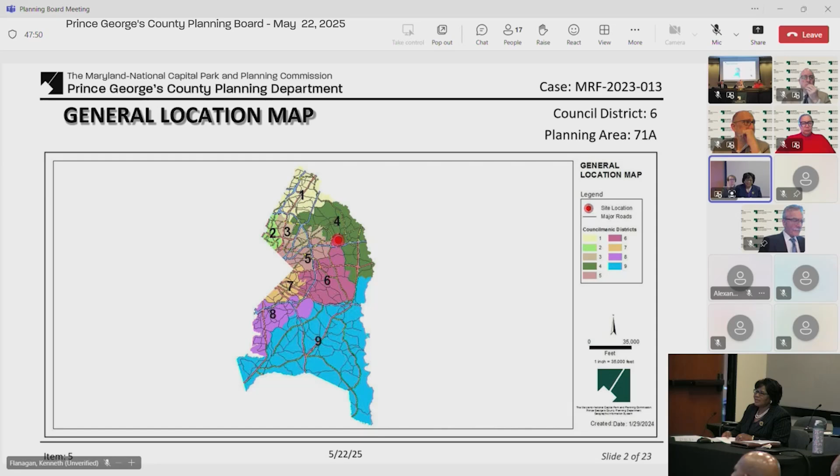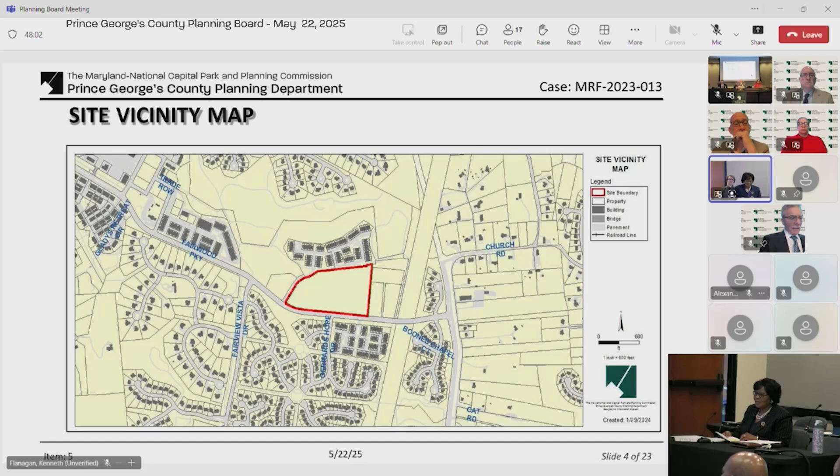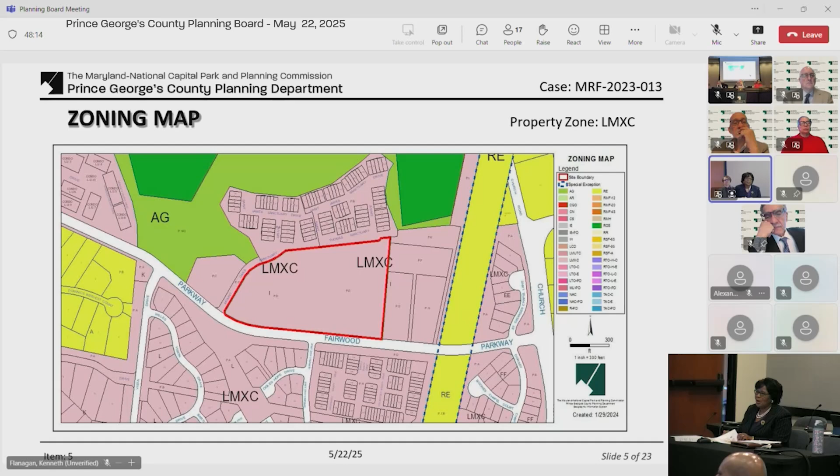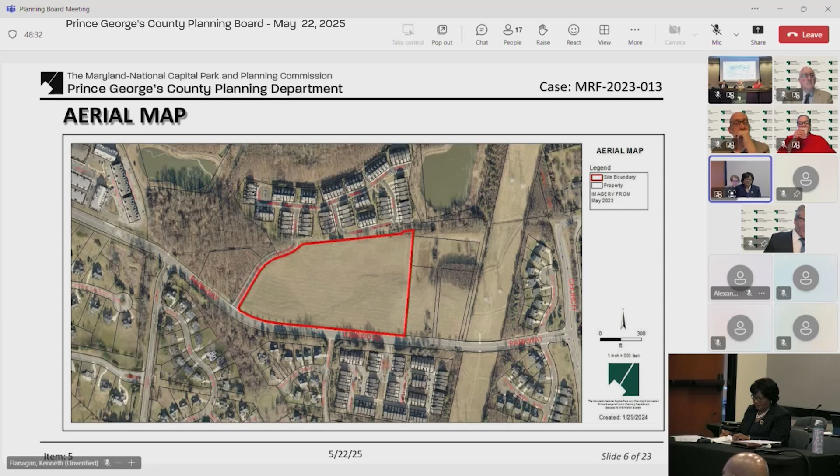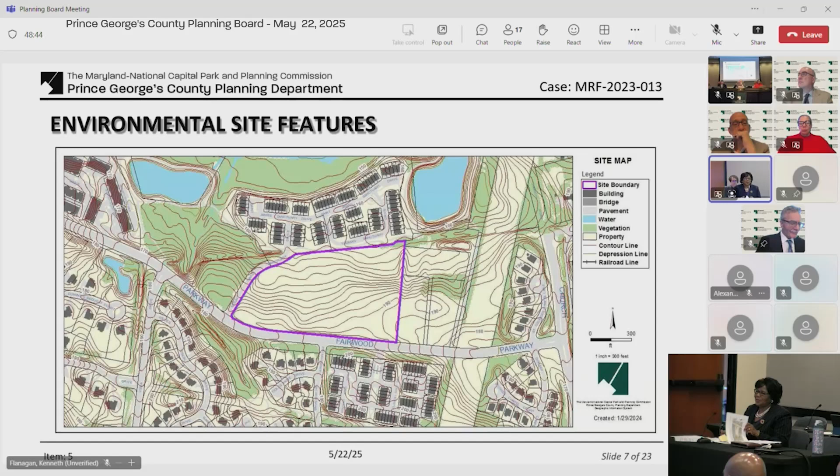This is an aerial view of the site. It shows residential area in the north. The project site is highlighted in red, and you see the townhouses in the north and south, with a vacant portion in the east, and the Pepco line on the east side of the site. Next slide, the environmental features show a relatively flat site with very few trees, and it's open field.

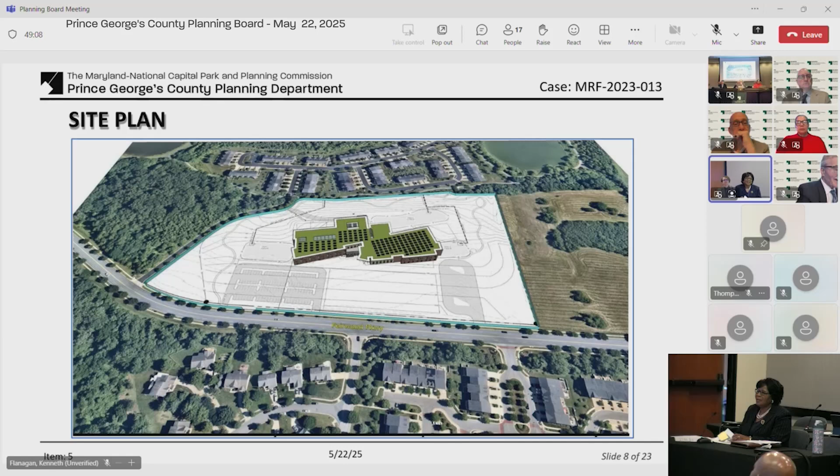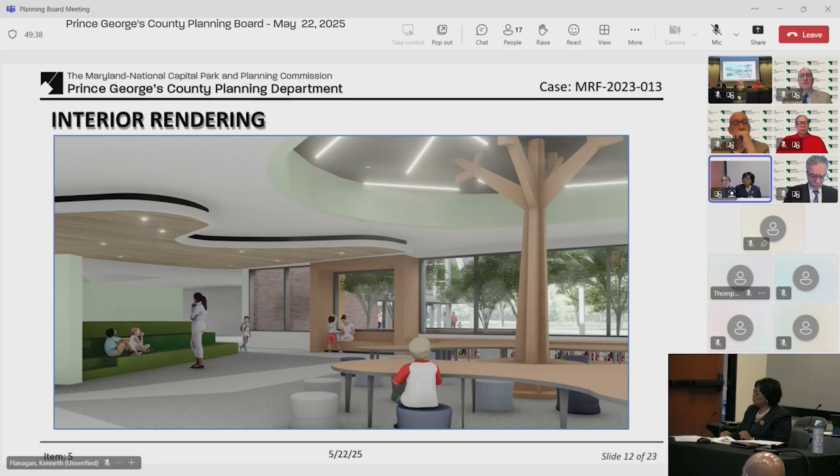South elevation. Next slide. This is a rendering of portions of the interior, showing how this high performance, energy performance building will look like when children walk into the building.

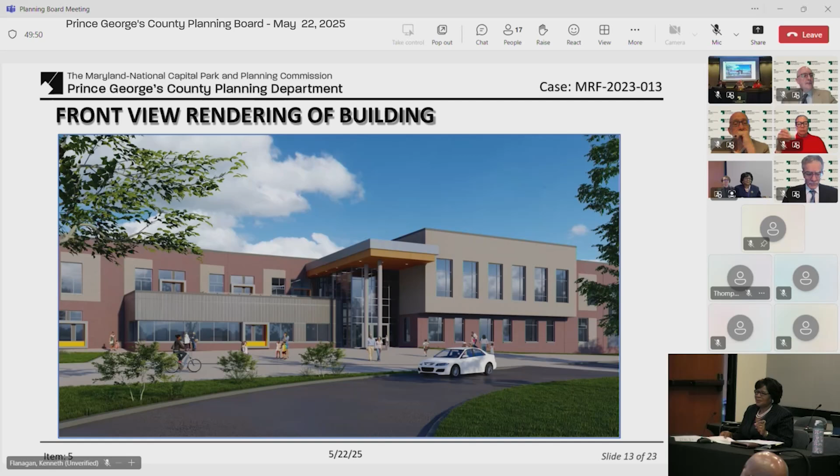Next slide, please. This is the circulation that shows the bus loop, which is at the front. Fairwood Parkway, south of the site, brings access to the side with the bus access shown in blue that makes the loop turn to bring students in the morning and take them out for queuing. The recommendations will include information on circulation and a lot of staff recommendations on how safety could be made efficient. So this is a new school bringing change in that section of the community.

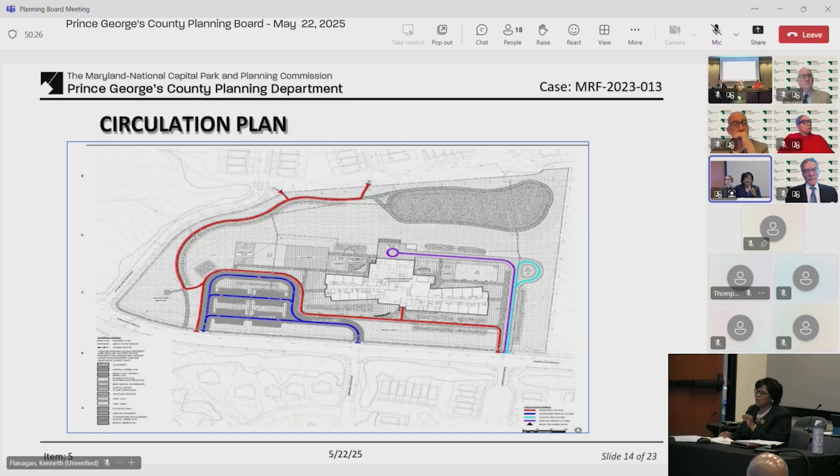How are people going to walk to this site? How will students walk there? How will the buses get in and out? And how will students be able to walk from the different neighborhoods to the site?

So the next slide is a landscape plan. Again, it shows white being the building, which is the 2-story building I mentioned earlier. It shows the bus loop. You can see south of Fairwood Parkway with the green in the middle. And this school, as many of the phase 2 schools, has outdoor classrooms, which is kind of a neat concept.

And then at the end of it, you can see the stormwater management pond, and the road, traffic, and pedestrian network wrapped into the site with the greenery, allowing the elementary school students to be able to be outside, with connections from both the southern part of the community, which is townhouses, and the northern part. This school is in the Fairwood community, which has about 2,000 residents, so there will be a lot of walking into this school as well as driving.

Next one, please. Next slide. This shows a little bit of plantings, what the landscape will look like from the previous slide I just showed about the landscape plan. This is just a specimen of what the native planting will look like.

Next slide. This slide highlights what the P3 school is going to be doing in most of the sites where they're building, what the outdoor classrooms will look like for students to be out, to be able to learn openly.

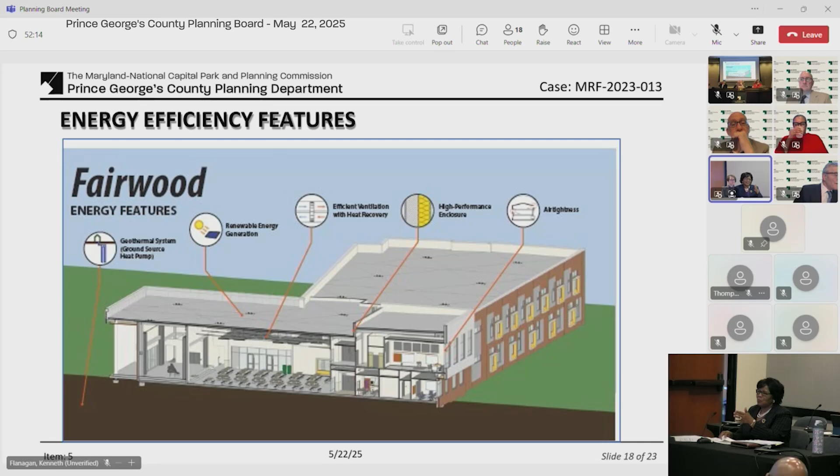Next slide. It's a high performance building, so it shows exactly the different elements of the environmental design for this site, how it will look like, and bring in open light, natural light into the area, and geothermal development. The next slide will show the features I highlight and explain more about the energy efficient features. Next slide.

So the feature I propose here is a 2-story building, 83,195 square foot, located at address 113250 Fairwood Parkway. It has 70 parking spaces, 4 ADA parking spaces (2 standard and 2 van spaces), 2 EV charging stations, 3 standard EV parking spots, 1 AV and 1 ADA van parking spot, and 15 bike racks with 30 parking spots.

There are outdoor classrooms, which I mentioned earlier. And as I said at the beginning, this new school will help shift the population of existing schools, which are Woodmore Elementary School, Glendale Elementary School, and Kingsford Elementary School.

The project schedule, the next slide, please. It brings us to project readiness, as you can see on the slide, to be 2027. And if there are any questions, I'm sure the school staff is here, they'll be able to respond to the schedule and how they will be able to address some of the concerns I raised with recommendations in the staff report on connectivity and traffic within the site.

The next slide gets us into recommendations. The first 3 slides really bring in some requests from staff for some things we did not get. We're asking the applicant to be able to provide them, and that's what the first 3 slides deal with.

Oh, okay. No, it is numbered. It's a little distorted, but it's just to the left of the curb cut of the entrance. Oh, number 11. Okay. Did you touch it? There you go, the cursor is on it. Right here, okay.

Is the monument sign a backlit sign? I'm just thinking of light pollution and intrusion on the neighbors and things like that. It's not, it's an LED sign. So we don't need to be worrying about the visual impact of the lighting? We have to put specs on it, so we're happy to provide that. It's very clear what it is, and you shouldn't have any pollution from that. Okay, great.

Signage questions? My concern isn't the monument sign. What I'm thinking about is signage for safety, so that if there are intersections - I know we have them in some of our parks - they light up. The US government has them too, across the river, they light up. I think they're probably solar, I'm not sure, but they light up and warn people that there are students and children present.

Carl Wilson, our traffic engineer. Carl Wilson with the traffic group. This is not signed as a school zone just yet, but it will be. The manual on uniform traffic control devices has a standard package of signs that would sign this as a school zone. Then there are additional signs you're referring to that could go near the crosswalks - beacons, essentially, where buttons could be pushed. They could be either solar or powered. We can work with DPIE and DPW&T to figure out the best way to install those.

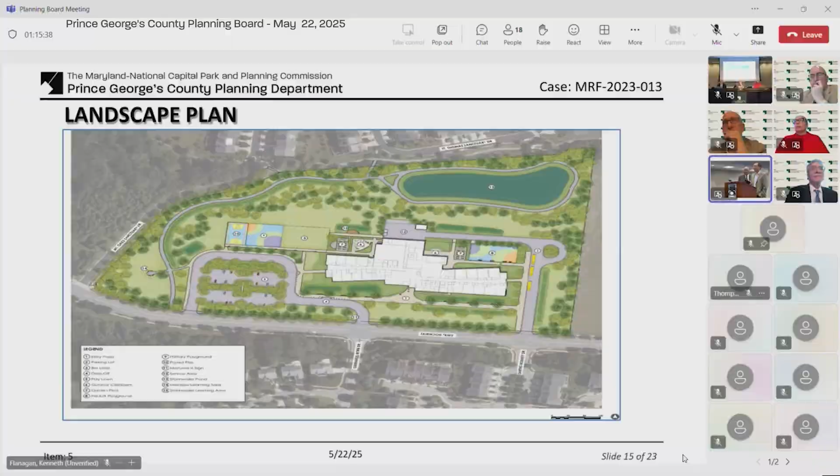Are there any conversations, maybe this is for you Sean Moore, with our Department of Parks and Recreation that would be helpful for you? And if not, it's okay, I'm just wondering if there's some value in that.

As you know, we're trying as a school system to work with the M-NCPPC to make sure we have a shared use of our recreational spaces, like the gyms and that sort of thing. There's no competition style field there, so it's not a major issue for them. One of the things the community's asked us to do is not turn this into an attractive nuisance, so we may end up fencing off the basketball court so we don't have unauthorized use during the evening time. Other than that, the spaces will be open and people will be able to walk across the campus or through it from a recreational standpoint.

Okay, thank you for that. What about security during the day for the kids? Because the flip side of open, accessible and walkable is we've got kids there and anybody's got access. So will there be security guards or?

There most likely will not be a security guard, but the building is designed using CPTED methods, so there are visual deterrents that will keep people from wanting to enter the way the administration sited. There's also going to be a controlled vestibule, so people won't be able to access the building itself without going through the appropriate locations, and the doors will be locked. There will be access to the outside for kids to play, but again, this will be an open visual area. As far as elementary schools go, this should be fairly safe. Of course you can't prevent everything, but for the most part, the site will be very secure.

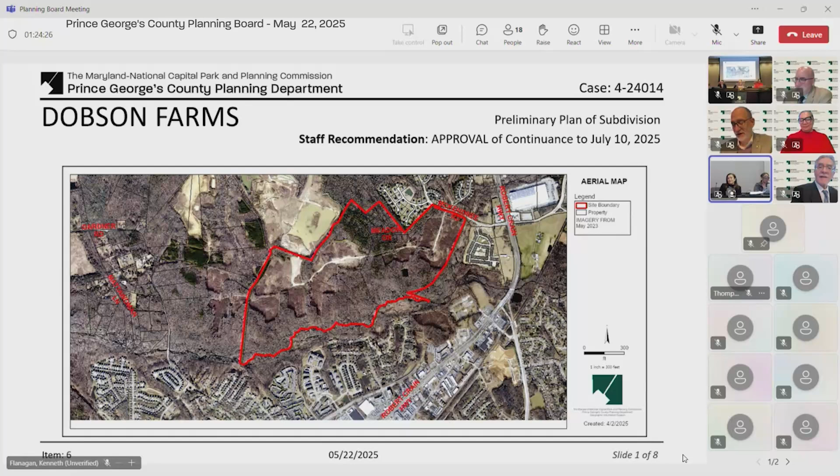I'll call the roll. Commissioner Washington, I vote aye. Commissioner Giraldo, I vote aye as well. I vote aye. The ayes have it, 3-0. Thank you, Mr. Tedesco. Thank you, Ms. Vatandus.

Item 7 on our agenda, Countywide Planning Division, March 2025 Cycle of Amendments, 2018 Water and Sewer Service Area Changes. Mr. Ray, this is yours, take it away. Thank you very much. For the record, my name is Bobby Ray with the Countywide Planning Division, and agenda item number 7 is a review and recommendation for the March 2025 application to amend the 2018 Water and Sewer Plan. Next slide, please.

The role of the planning board in this review is a determination of consistency with the general plan, to provide any information and/or assistance needed by the county executive and county council. The memorandum included in the packet provides planning staff's recommendation as well as the county executive's recommendation for the application received. The larger report provides all the comments from the planning department as well as comments from WSSC, DPIE, and the county health department. Next slide, please.

One application is being reviewed for the March 2025 cycle. At the regular meeting of May 6, 2025, the county council introduced resolution CR 053-2025 for the March 2025 cycle of amendments. Next slide, please. This is our sole application for the March 2025 cycle.

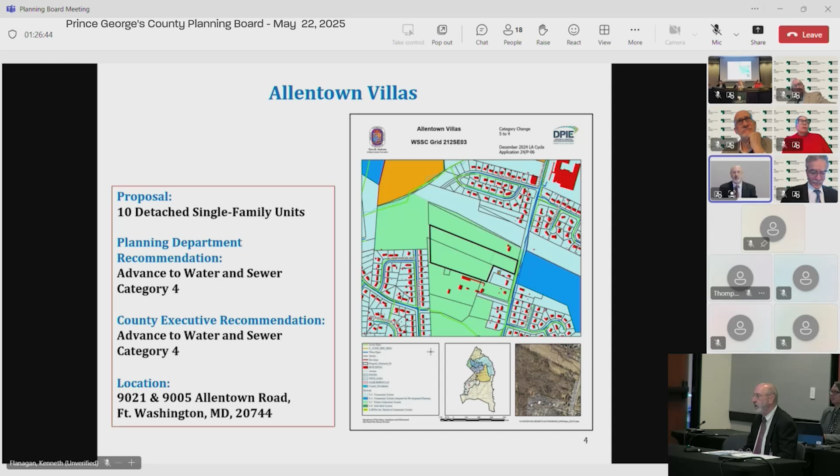Allentown Villas is a proposed development with 10 single-family detached units at 9021 and 9005 Allentown Road in Fort Washington. The request is from Water and Sewer Category 5 to Water and Sewer Category 4 and is supported by the County Executive's Office. So staff requests that the Planning Board direct staff to submit the planning comments to the County Council for their consideration as this moves through the process of committee and then back to the County Council for hearing and action. That concludes staff's presentation.

Thank you, Mr. Ray. I see Mr. Rivera is signed up, but I don't think he's here. I don't see him online either, do I? I'm here. Oh, you are? Okay, great. If there's no questions for Mr. Ray, we'll turn to our sign-up sheet. Mr. Rivera, anything you want to join in on with this? And of course, if you could introduce yourself for the record.

Thank you, Mr. Chairman, members of the board. For the record, Norman Rivera, representing the applicant in this sole category change application. As Mr. Ray has stated, the staff is recommending approval. The county exec recommended approval. DPIE and the other agencies have also recommended approval. The land use is in accord with the established communities, part of the general plan, the master plan, et cetera. So we are looking forward to moving forward to the county council level.

Thank you very much. Thank you, Mr. Rivera. Colleagues, there's nobody else who signed up to speak. Unless you have any questions for Mr. Rivera or staff, then I would look for a motion.

Mr. Chairman, I move that we request staff to transmit the planning comments to the Prince George's County Council for Allentown Villa Sewer Plan. Second. Got a motion by Commissioner Washington, a second by Commissioner Geraldo. With no discussion, I will call the roll. Commissioner Washington, I vote aye. Commissioner Geraldo, I vote aye. I vote aye as well. The ayes have it, 3-0.